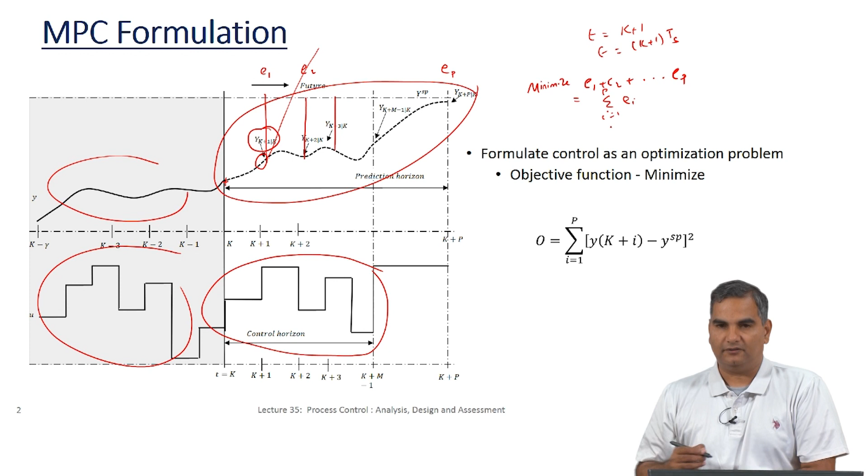So, when I try to minimize, the first thing you can think of in terms of objective function is to say, let me minimize E1 plus E2 all the way up to EP. So, this basically I can write as sum over i equal to 1 to P of Ei. So, this is something that I can do, but you will notice right away that there is a problem with this. The problem is, for example, if I have this point, and then let us say I go here and then come down here, then I could have positive and negative E's, which will make this become smaller and smaller. It can even take it to 0.

However, the problem will be that each of the errors themselves will not be 0. The other thing is the idea is to take the errors above set point, in which case all the errors will be negative. So, from a minimization viewpoint, it is a good thing to keep getting smaller and smaller values. In which case the Eis can become very negative, and you will still be minimizing this, but your objective is not that. Your objective is to ensure that E1 to EP are all as close to 0 as possible. So, just adding them up will create all kinds of problems, and you cannot really use this as a minimization objective.

So, the minimization objective that people usually use is to say, let me minimize not sigma Ei, but Ei squared. So, what this means is, instead of minimizing E1 plus E2 plus E3 and so on to EP, I want to minimize E1 squared plus E2 squared plus E3 squared all the way up to EP squared. Now, whenever we try to minimize, the lowest value this can ever take is already known, which is 0, because this is a sum of squares, and that 0 you will get only if each of these terms are 0.

So, since no term has the ability to become negative, all of them are positive, the lowest value is 0, and the lowest value is achieved whenever E1, E2, E3 all the way up to EP are 0. Even if you have one negative, that squared will be a large positive value. So, basically the idea is, instead of minimizing sigma Ei, you minimize sigma Ei squared, and then you are guaranteed, when the optimization objective keeps going down, collectively all the E1 to EP are going down. It is not possible for one to become very negative.

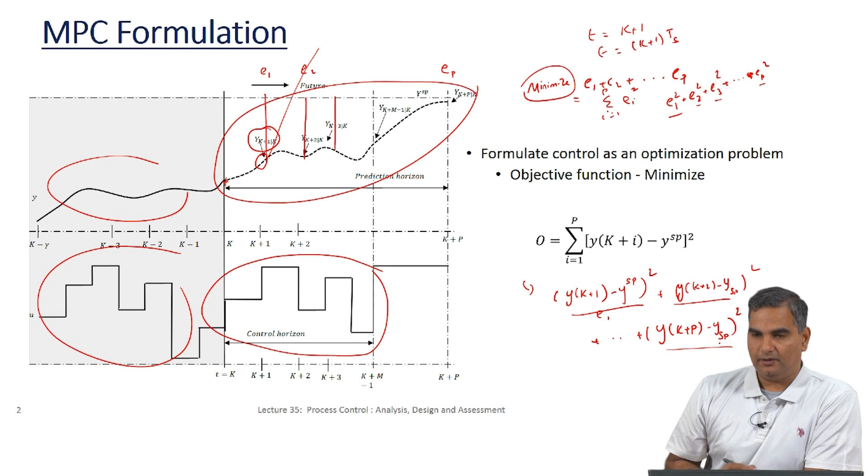Now, if this objective function is minimized, then each of these errors are minimized. That means, whatever I have predicted in the future in terms of the output value, those are actually pretty close to the set point, because each one of these terms is going to go smaller and smaller. When these terms go smaller, the difference goes smaller, that means the output is very close to the set point.

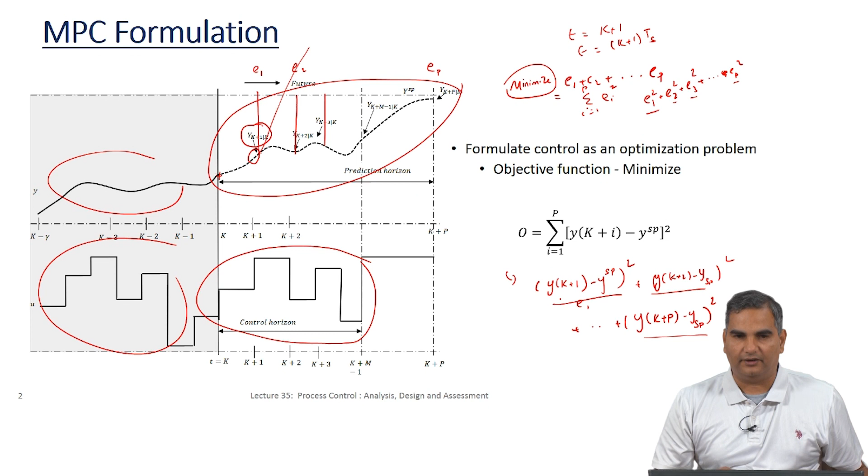So, from a control viewpoint, the objective of minimizing the errors collectively is taken care of if I look at an objective function like that. So, that is the first component of the optimization problem, which is basically the objective function. Now, this objective function is something that we have defined already. How do we define the other two components of the optimization formulation?

So, once the objective function is defined, the top portion of this picture we are kind of done with. Now, we are going to focus on the bottom part of the picture, and the constraints are generally going to be on the inputs. There could be constraints on the output also. Those are more advanced formulations which we are not discussing here. So, let us look at the bottom portion, where the manipulated variables are being shown.

So, the idea from a model predictive control viewpoint is we want to make these control moves in such a way that the errors are minimized. We have already posed the minimization of errors as an objective function, so that is taken care of. Now, what this move plan is, is something that we have to see: the moves that I am going to make. Remember we are still talking about a single input single output control.

So, there is only one U, but since there are many control moves that I am going to make, that is, I am going to make this formulation identify the values that I should keep for this input variable at different times, I am going to think of each of them really as a variable. So, the variables that I have, which I will come back to in the next slide, are uk all the way up to uk plus m minus 1.

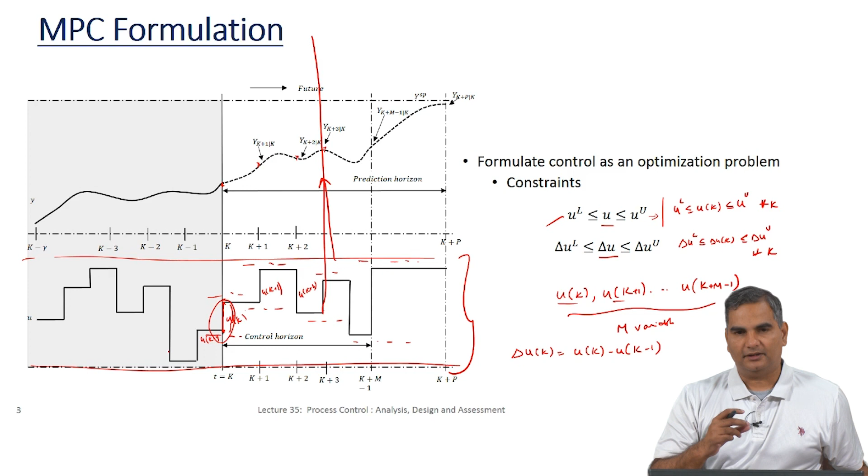Now, we have talked about two of the components of the optimization formulation. One is the objective function, and the other one are the constraints, and the constraints are of two types. One is on the range of u itself, and the other one is on the range of delta u. So, once you have these two, the third component is actually the decision variables, and the decision variables are the variables for which I have to find values, and in this case I have to make a decision about the control move plan. What are the control variable values that I am going to have.

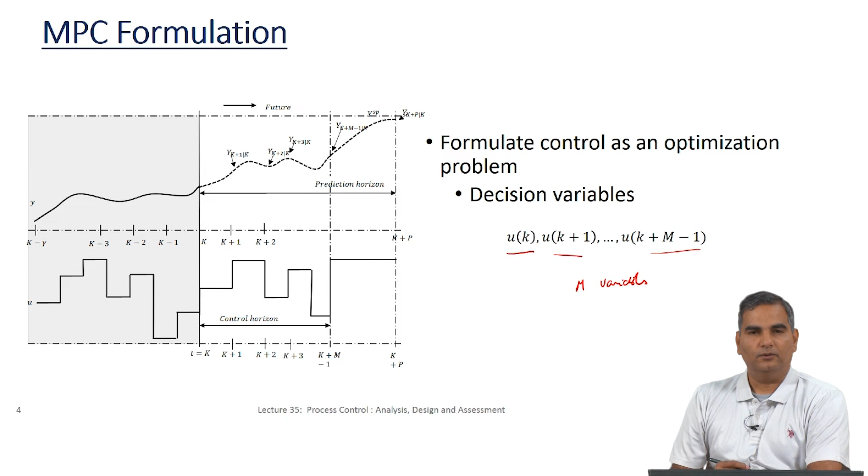So, this is the same control input, but at different times, again just to reiterate. So, I have to make decisions about what value this control input will take at time k, at k plus 1 all the way up to k plus m minus 1. These are the m variables that I talked about. Okay. So, now you see how the MPC formulation has become an optimization formulation. From this picture, if you understand these equations, then you have basically understood the main concept of MPC.

So, the objective function tells you that you are trying to minimize the error. In some cases, when you want to generalize this, you might say I do not want to just minimize the error, but I also want to minimize the control effort that I take, which is I do not want to take very large control moves u, because that takes money and effort. It might be that the objective function is not only the error squared that I have, this is the generalization of the formulation, but also this u squared.

What this u squared tells me is, if I take very large control moves, this will be large, which will be bad for minimizing the objective function. So, I want to keep the move sizes as small as possible. So, in some sense what it says is how close can I get to my set point without expending too much effort, which is typically what we do in all of the problems that we solve. So, we have a goal, we want to get to that goal. At the same time, many times we want to see what is the kind of minimum effort that is possible to get to this goal.

Not simply because maybe we are lazy, it is because once you minimize the effort towards this goal, you have more time to pursue other goals that you want to pursue. Very similar idea in control. So, this is your pursuit of your goal, which is going to the set point, and this is the effort that you need to put into getting to that set point. So, in some sense you want to minimize both of this, that is, you want to minimize how far away from the goal you are, and you also want to minimize the kind of effort that you are going to put in. So, this is the objective function.

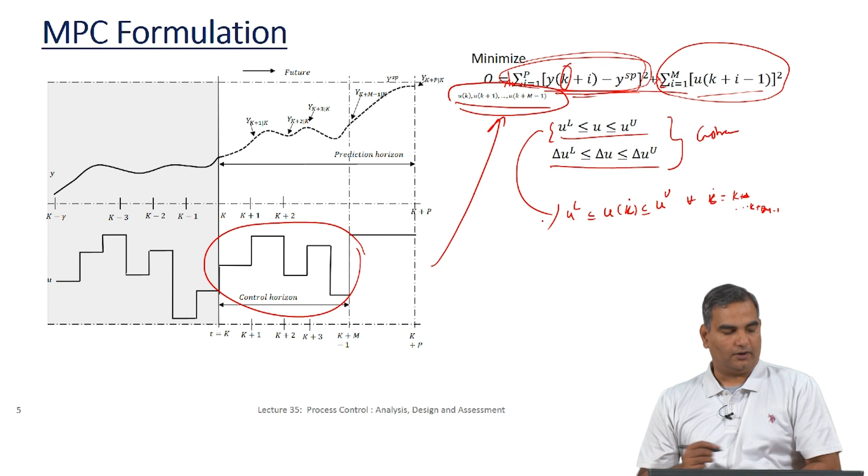Okay. Sorry, this is going to be k to k plus m minus 1, because this is talking about the control move. So, this is how we combine this and put together the formulation for model predictive control. Now, in the last slide we talked about the formulation, we talked about the notion of horizon and how all of these are combined into a mathematical formulation.

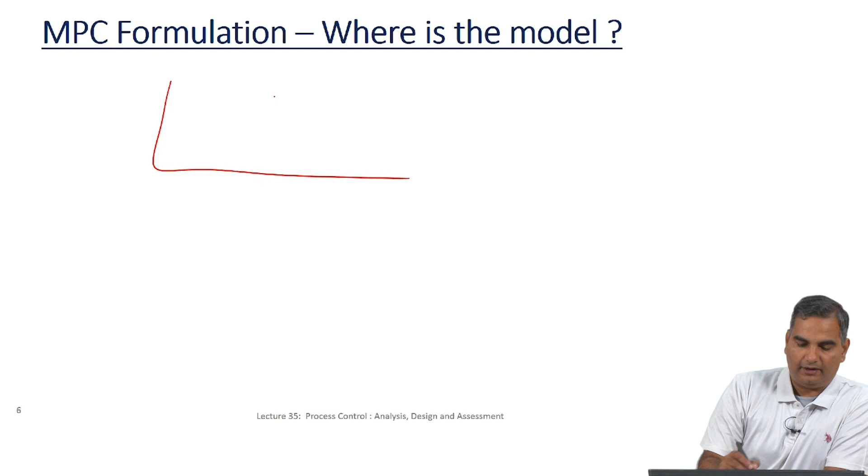So, the next question that you might ask is, okay, where is the model in all of this? So, you have written y, you have written u, you have written an objective function, and you have written constraints and so on, but where is the model in this? So, as I said before, when I am sitting at time t equal to k, I have this output and I have these inputs I am going to make. Now, I do not know the values of this, and I have not made decisions yet about these also.

However, the formulation is going to relate the decisions I make to what happens here. So, if I want to make decisions here, then I should somehow figure out what is the effect of these decisions on the output, and I want to compare that effect with a set point. So, that is a basic idea of optimization. So, what I need really is to connect what moves I plan to make in the future to what will be the impact, and this is where the model comes.

Now, in many cases we have looked at models which are continuous models, but in this case what we are interested in is the move plan, uk plus 1 all the way up to uk plus m minus 1. I want to know how these are going to affect y k plus 1 all the way up to y k plus p. So, these are future outputs that I am expecting. So, when I actually implement this move plan, what will be the output?

Now, I am going to check how close these outputs are to set point, and I am going to make changes to this so that these outputs are as close to set point as possible, and this is where a model comes into the picture. So, we will explain how the model comes into this to complete the whole MPC formulation in the next lecture.